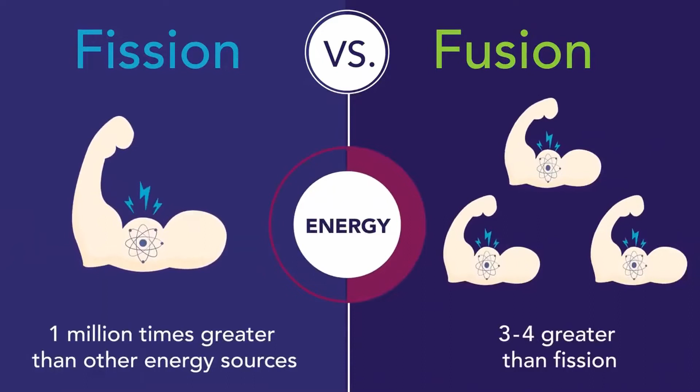Energy is key to our prosperity and well-being. But we need to reduce the use of fossil fuels because they produce greenhouse gases and contribute to climate change. A sustainable energy mix is the answer, and fusion can be a promising long-term option.

Fusion is the energy that powers the stars. Our sun is the source of life and light on Earth. It's also one of nature's biggest fusion devices. In its core, hydrogen atoms move at incredible speed. Due to the high pressure, they collide and fuse into a heavier atom, helium. The reaction releases lots of energy in the form of light and heat. This is what we call fusion.

Fusion can be a limitless source of energy. The fuel it requires is abundant, reducing the risk of any geopolitical tension. It does not emit any greenhouse gases. Fusion machines are inherently safe, pose no risk to nearby populations, and generate no long-lasting waste.

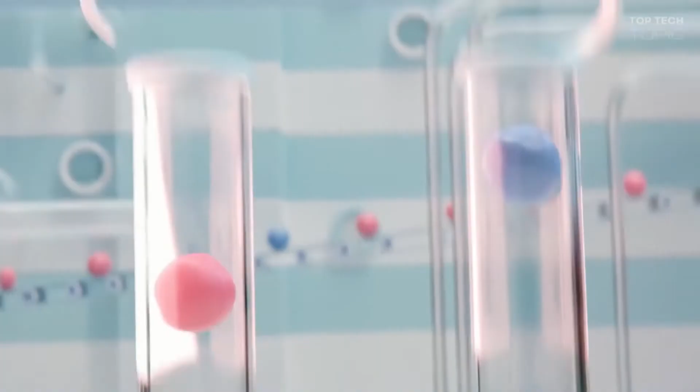To replicate the fusion reaction, we need to crush two types of hydrogen. Because they're both positively charged, they tend to repel one another. On the sun, due to the strong gravitational forces, hydrogen atoms fuse at 15 million degrees Celsius. On Earth, however, they would need to be heated to temperatures as high as 150 million degrees Celsius in order to collide and produce a hot gas called plasma.

For decades, scientists have been trying to produce fusion energy through various experiments. They came up with the idea of producing a super-hot plasma in a toroidal vessel, then capturing it with powerful magnets to keep it away from the walls. This is how the tokamak was born. Europe is working together with 6 countries to build ITER, the biggest fusion device, to help us get closer to this new energy.

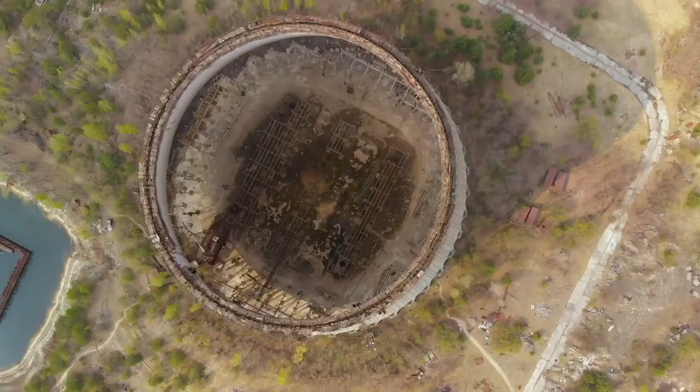Think of nuclear power, and many imagine the worst: atomic bombs, reactors melting down, radioactive wastes. There's no denying that the history of nuclear is fraught, and the dramatic and disturbing moments are hard to forget.

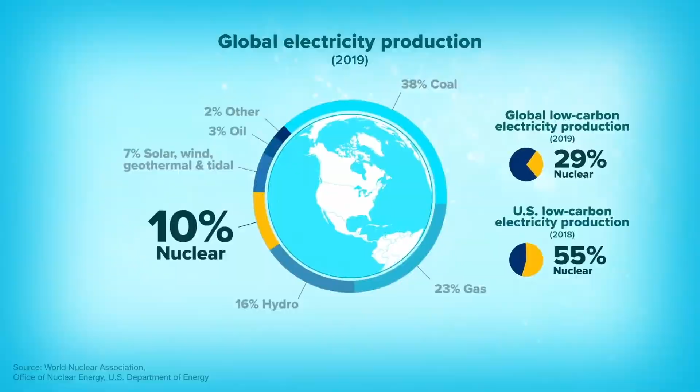But for the most part, nuclear energy operates out of sight and out of mind, generating about 10% of the world's total electricity. This represents 29% of all the world's low-carbon power, and 55% of the United States' low-carbon power. Nuclear reactors generate energy day and night and produce no greenhouse gases.

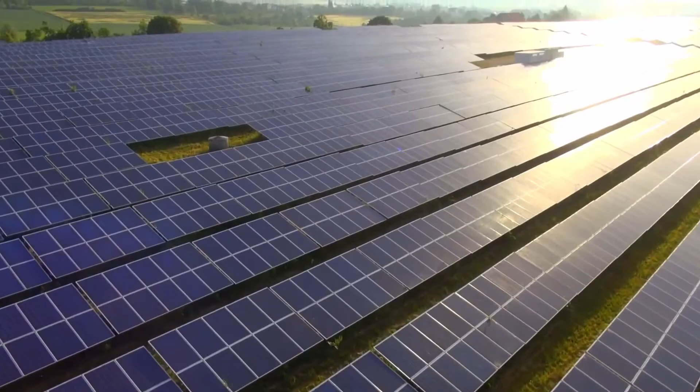But overall, the growth of nuclear is slowing in comparison to other low-carbon sources like wind and solar. Nuclear power plants are expensive to build, construction often takes longer than expected, and debates over how to handle radioactive wastes rage on. What's more, public opposition to nuclear power is strong, especially in the US.

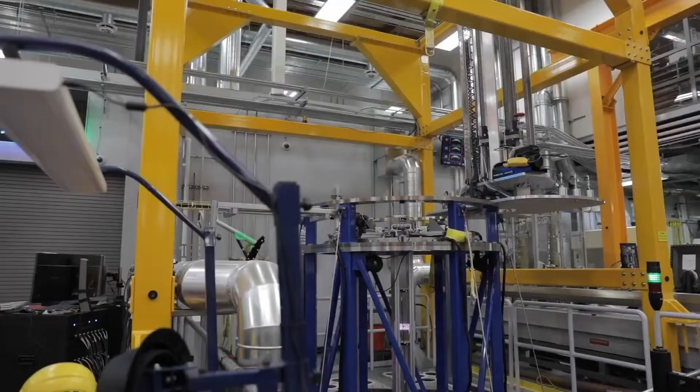But we're in the midst of a climate crisis, and many energy experts argue that despite a contentious history, nuclear has a key role to play in our energy future as a stable, always available source of power. Some experts are working to upgrade existing nuclear power technology, designing safer and more efficient fission reactors with the support of philanthropists like Bill Gates.

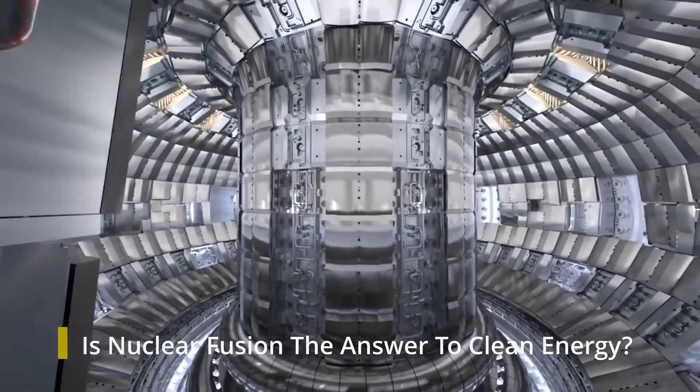But government labs, private investors, and intergovernmental organizations are also devoting vast resources to what many consider the holy grail of energy: nuclear fusion. Nuclear fusion is the same process that powers our sun and every other star in the universe. And if we can figure out how to harness that power here on Earth, it would be a huge game changer.

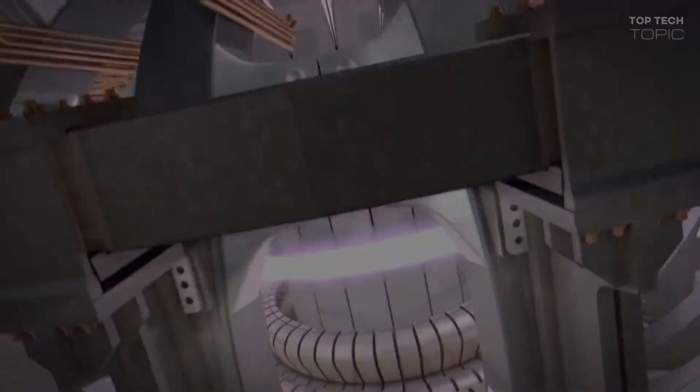Nuclear fission was discovered in late 1938 by a pair of German researchers. They found out that when you bombard uranium with neutrons, the nucleus splits, forming 2 lighter isotopes and releasing mass that gets converted into energy.

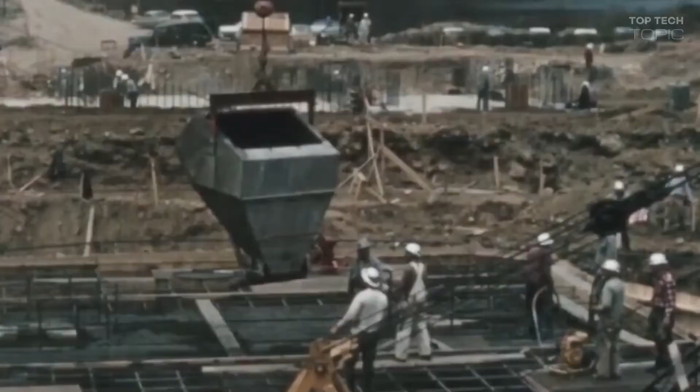The discovery paved the way for the development of the atomic bomb in the United States. And after the infamous bombings of Hiroshima and Nagasaki, concerns over nuclear proliferation spiraled as the global nuclear stockpile grew during the Cold War between the United States and the Soviet Union. But in 1953, President Eisenhower's Atoms for Peace program attempted to shift the focus of nuclear power toward peaceful energy generation, and much of the world started building nuclear power plants for civilian use.

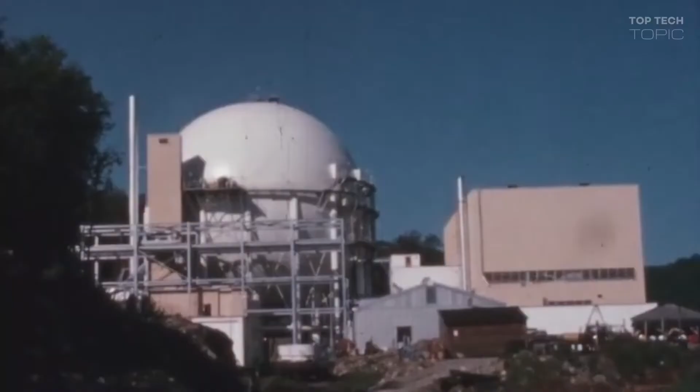Private industry quickly jumped on board, especially in the United States, and by 1991, the US had twice as many operating nuclear power plants as any other country. As of 2019, about 450 reactors worldwide operate in 31 countries. And some countries, such as France, Hungary, Slovakia, and Ukraine, get more than half of their power from nuclear energy.

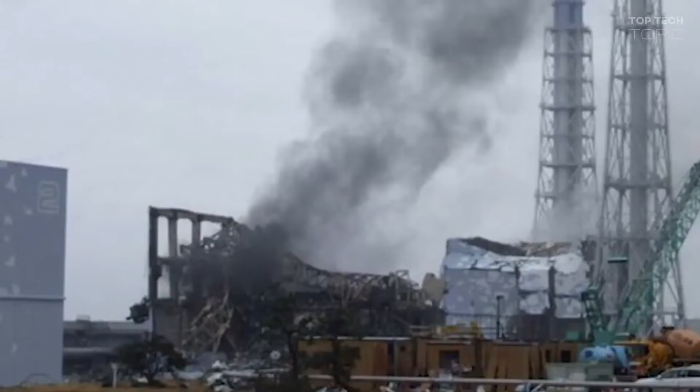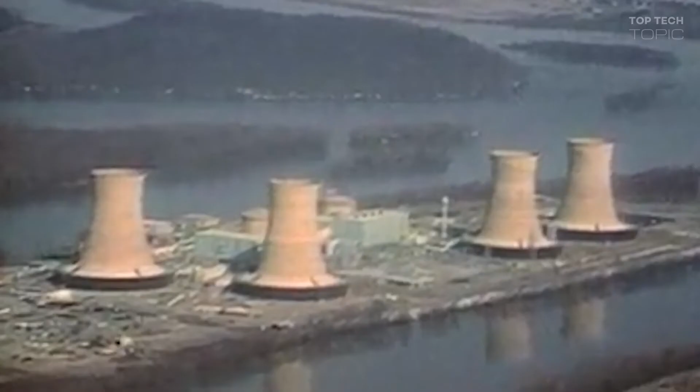But over the decades, a number of high-profile disasters have stalled the industry's momentum. In 1979, the partial meltdown and ensuing radiation leak at Three Mile Island in Pennsylvania cost about $1 billion to clean up. The disaster stoked public fears about nuclear power. Stricter safety standards were imposed, reactors became more expensive to build, and fewer were built.

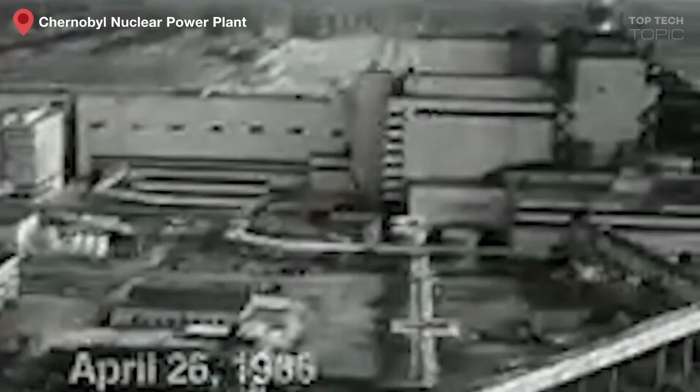The nuclear disasters at Chernobyl in 1986 and Fukushima Daiichi in 2011 led to further scrutiny of the industry, as concerns mounted over the long-term effects of radiation exposure.

And then there's the battle over where to store nuclear waste. One proposed site, Yucca Mountain in Nevada, has been hotly contested for over 30 years. Yucca Mountain is unfit as a repository site for nuclear waste because of the impact it would have on national transportation.

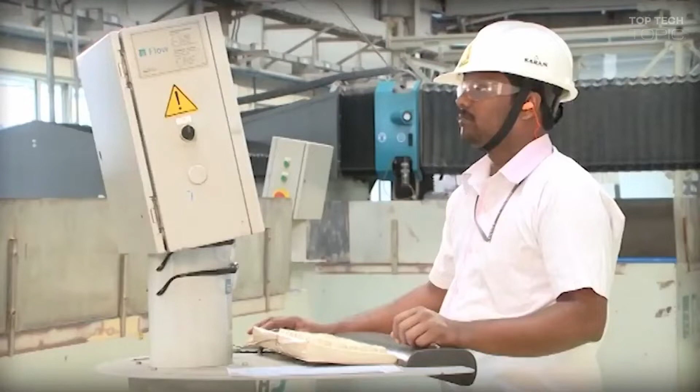The current state of the industry remains mixed. Countries such as China, India, and Russia are building new reactors at a fairly fast clip. But in the United States, more than one-third remain unprofitable or face closure.

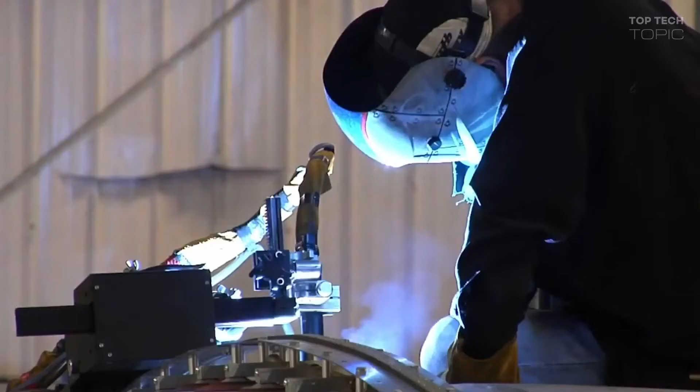Only one new nuclear reactor has come online in the U.S. since 1996, as costs and construction times in developed economies have spiraled. Next-generation fission technologies are much safer than reactors of the past, and some proponents claim they'll be cheaper too. The general public may still need convincing, but one idea has outlasted the controversy: the promise that someday nuclear fusion will provide a better alternative.

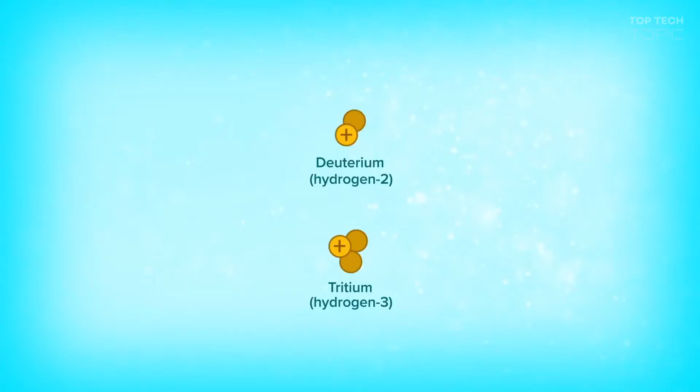Scientists have been researching nuclear fusion since the 1920s, ever since they learned it's what powers the sun. In a fusion reaction, extreme temperatures and intense pressure cause hydrogen atoms to fuse together, forming helium atoms. In the process, the atoms lose some mass, which is converted into vast amounts of energy.

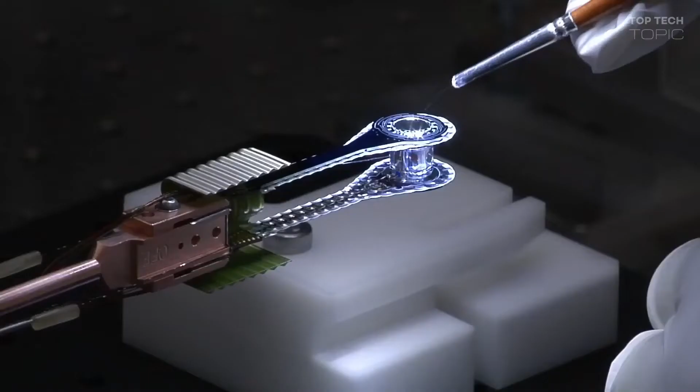The reaction could produce 4 times as much energy as nuclear fission, and nearly 4 million times more energy than burning coal or gas. But after decades of research and billions of dollars, scientists still have not found a way to create a sustained fusion reaction. That's created a not-so-inside joke among scientists, that fusion is the energy source of the future and always will be.

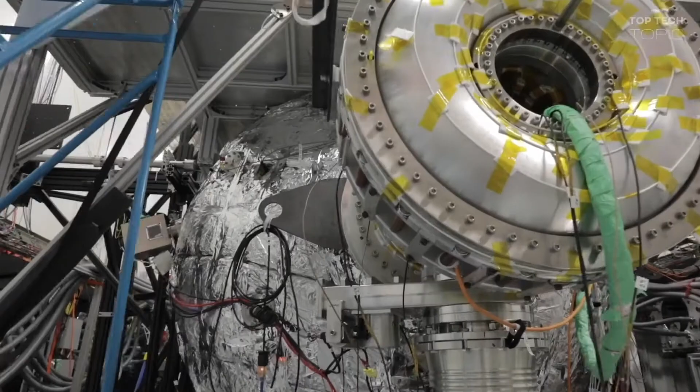But some think these questions and jokes overlook the real progress that's been made. Fusion has traditionally been the purview of government labs like Lawrence Livermore and Oak Ridge. But more recently, a number of private companies have thrown their hat in the ring. This includes General Fusion, which aims to bring a commercial reactor to market in the 2030s. Amazon CEO Jeff Bezos is among the company's investors.

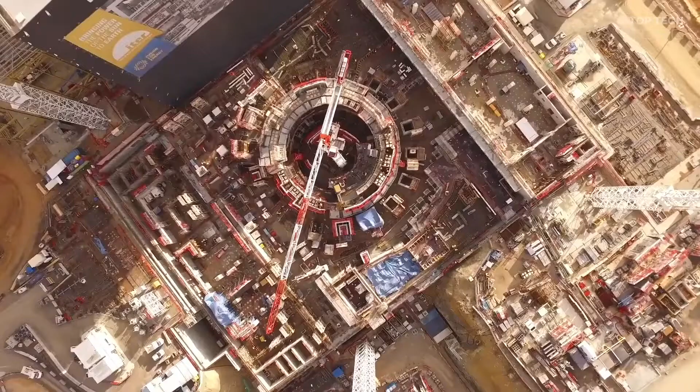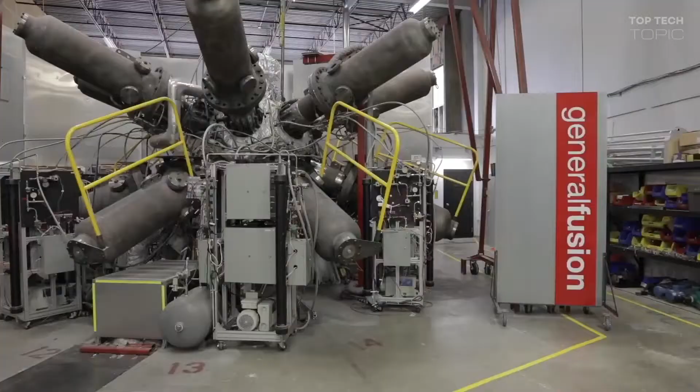And then there's the large multinational effort that's underway in the south of France. Called the International Thermonuclear Experimental Reactor, or ITER, the project aims to create the world's largest and most powerful fusion reactor. While all of these players are competing for resources and funding, that could actually be a good thing for the nuclear power industry overall.

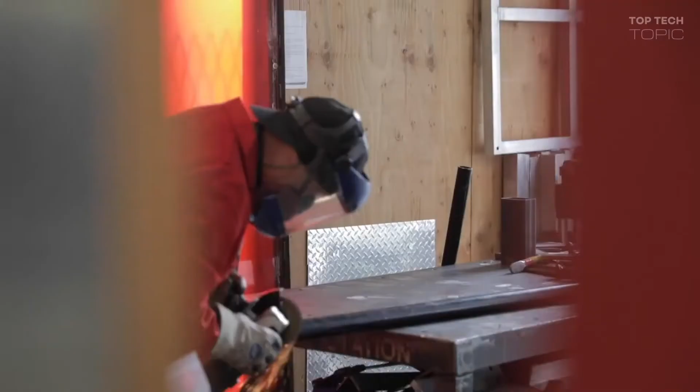General Fusion, founded in 2002, operates out of a nondescript office park about 20 minutes outside of Vancouver. Unlike most government labs or academic institutions, General Fusion is focused on implementation over research. The company's goal is to build an electricity-generating fusion reactor in the next decade or two.

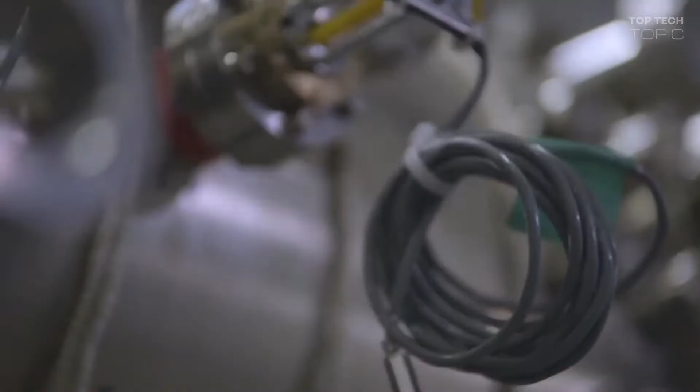Jeff Bezos was an early investor, and the company has now raised over $120 million, with about $90 million coming from private investment and $30 million from the Canadian government.

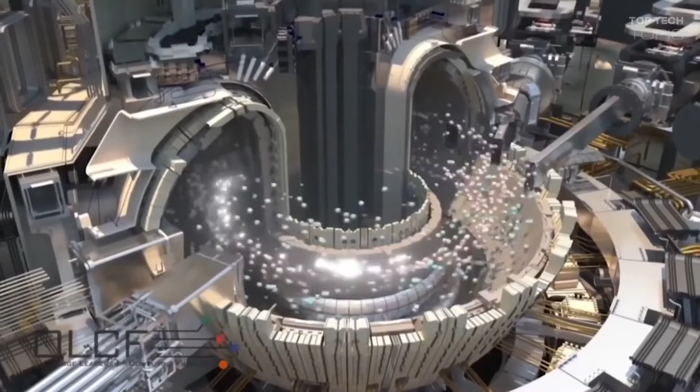General Fusion combines 2 common approaches in the industry: inertial confinement, which subjects the fusion fuel to extremely high pressure for a brief amount of time, and magnetic confinement, which uses modest pressure for a prolonged time. When heated to extreme temperatures, the fusion fuel becomes a plasma, a state of matter similar to gas, except that it contains charged particles that allow it to conduct electricity and respond to magnetic fields.

Our compressor is going to be a big sphere, about 4 meters across, 15 feet across on the inside. And into that big sphere, we are going to put liquid metal. And that liquid metal we're going to spin around in a circle so it opens a hole. And into that hole, we're going to put our fuel, which is hydrogen gas. It's preheated up to a few million degrees.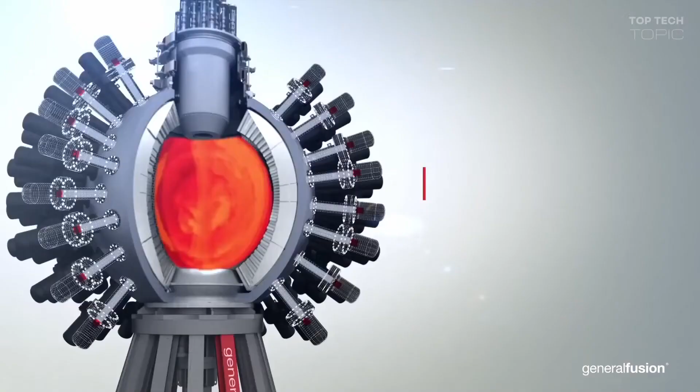And then all around the outside of this sphere is a big array of pistons driven by compressed gas. So they push on the liquid metal and they collapse the hole with this fuel trapped inside. And that collapse happens very quickly and compresses the fuel up to fusion conditions. At the peak of the compression, the fuel ignites and gives a fusion reaction.

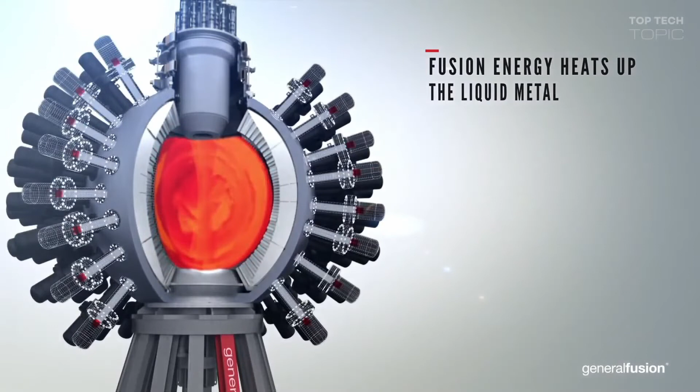That energy goes into this liquid metal, so the liquid metal heats up. You take this hot liquid metal out, you run it through a heat exchanger and you boil water and make steam. And the steam drives a turbine to make electricity and puts it out on the grid. And we just keep pulsing and do that over and over again.

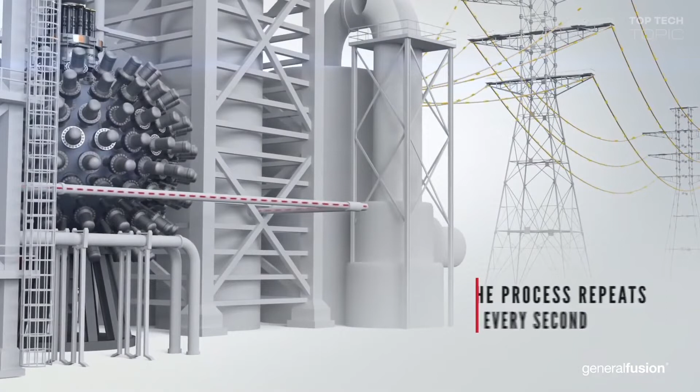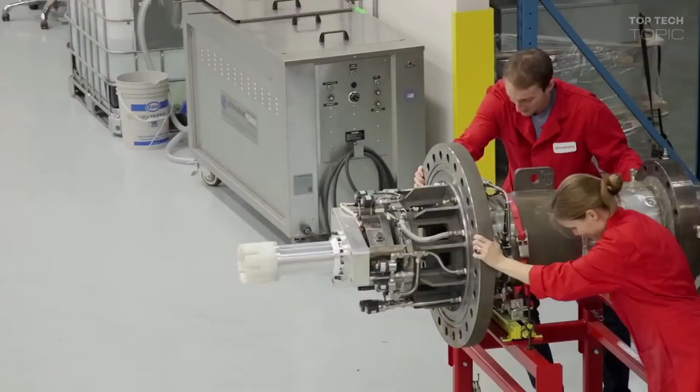Right now, General Fusion's main components, like its plasma injector, piston array, and fuel chamber, all exist separately. Laberge wants to integrate them into one large demonstration reactor, a process he estimates will take about 5 years.

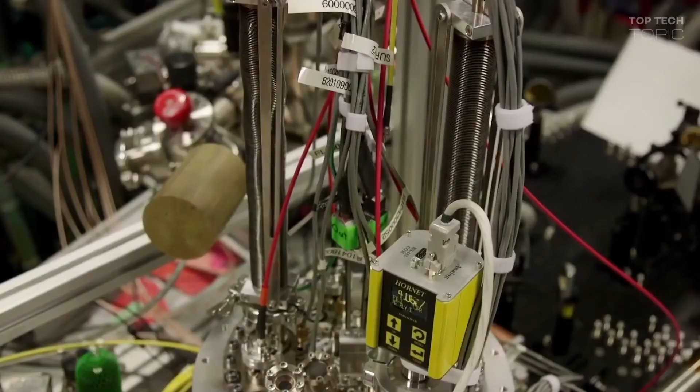A space roughly this size would fit a power plant that would be enough for 100,000 homes. And when the reactor goes online, LaBerge says it will bring General Fusion's cost of power into competition with coal and renewables like wind and solar.

LaBerge hopes it will eventually become cheaper, though, a likelihood if the U.S. decides to implement a carbon tax. But some industry experts believe that private companies like General Fusion are being overly optimistic with their timelines.

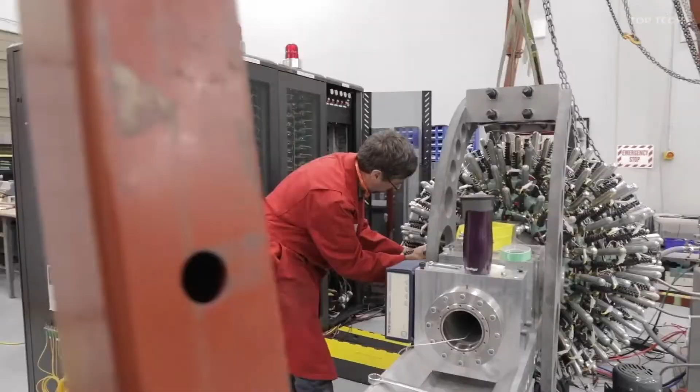Nuclear fusion is hard. No research group or company has ever been able to reach the so-called break-even point, at which the energy released from a fusion reaction is greater than the energy required to heat the plasma used in the reaction. But basic research is the bread and butter of Lawrence Livermore National Lab.

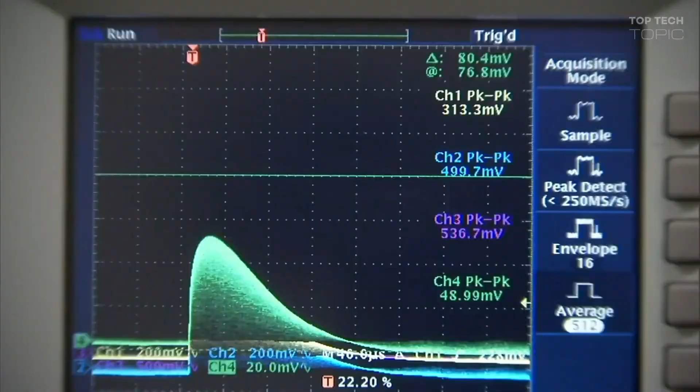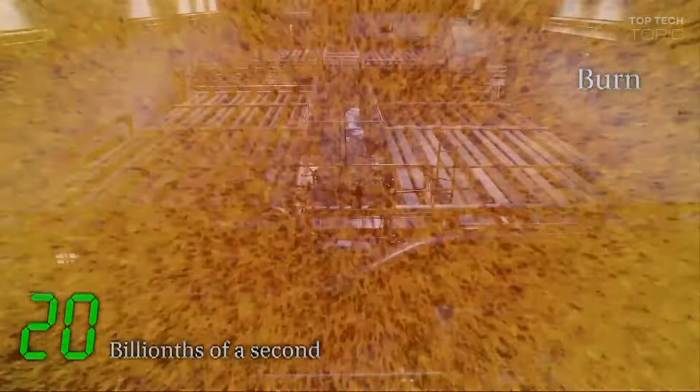It's been researching fusion since its establishment in the 1950s. In 2009, the lab opened the National Ignition Facility with the goal of achieving break-even and ultimately igniting a fusion reaction. Lawrence Livermore is pursuing inertial confinement fusion—that is, confining plasma at extremely high pressure for a very short amount of time, using high-energy lasers to do so.

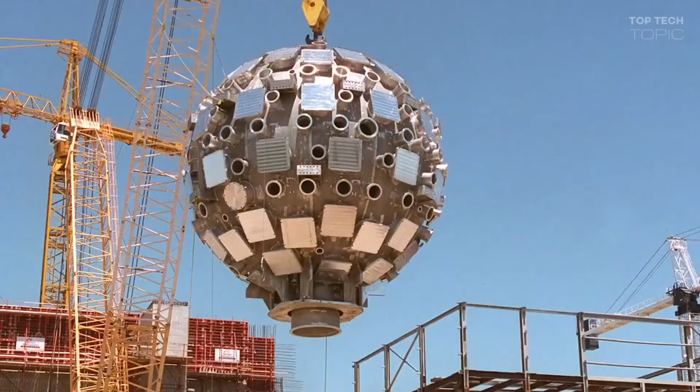We're standing in what we call our target bay, looking at our target chamber. The target chamber is a big ball about 30 feet across. And at the very center of that ball, we put a very tiny target about the size of the tip of my finger.

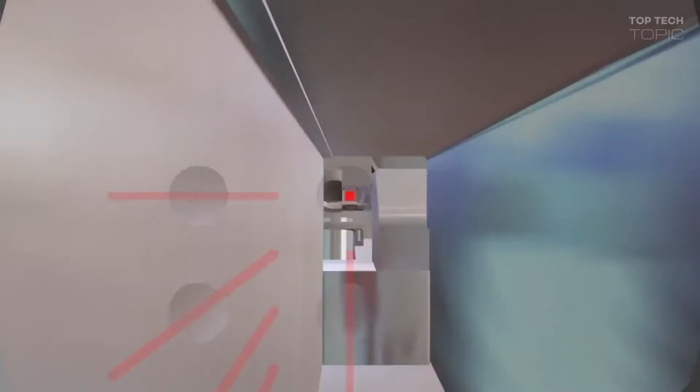Researchers at the National Ignition Facility and other national labs have access to enormous computing power, allowing them to run complex simulations that help them understand the exact conditions necessary to reach ignition. Based on our best simulations, they say that a facility of this scale is big enough to create this runaway reaction if everything works nearly ideally. But clearly, getting everything to work perfectly in the real world is much harder than it looks on a screen.

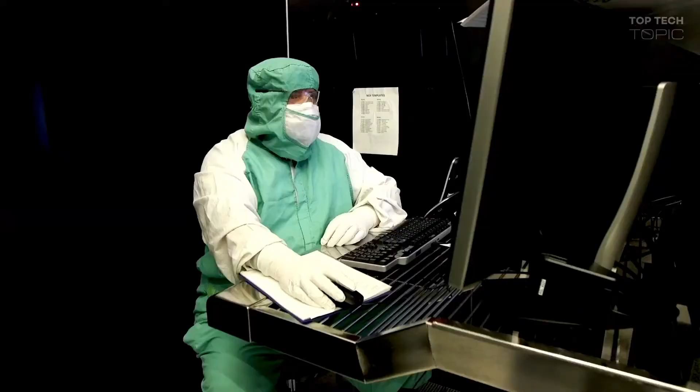So it could very well be that neither the well-funded, research-oriented national labs nor the scrappy, goal-oriented startups are going to solve the fusion puzzle. It might just take an international effort.

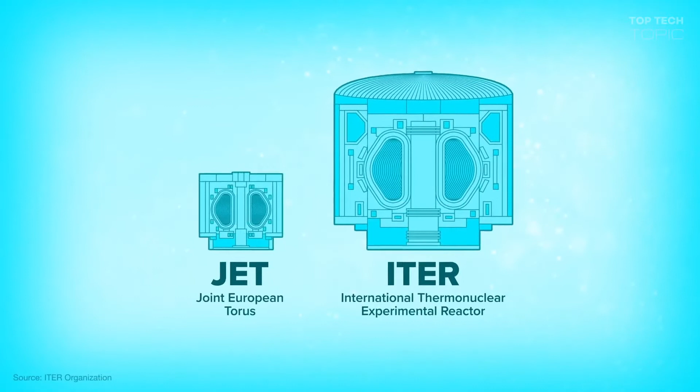The ITER project, originally known as the International Thermonuclear Experimental Reactor, originated nearly 35 years ago at the Geneva Superpower Summit. Now, China, the European Union, India, Japan, Korea, Russia, and the United States are all working together to build what would be the world's largest tokamak reactor, the donut-shaped device used for magnetic confinement fusion. Currently under construction, ITER's tokamak reactor will be twice the size of the current largest machine, and aims to produce 500 megawatts of fusion power from 50 megawatts of heating power.

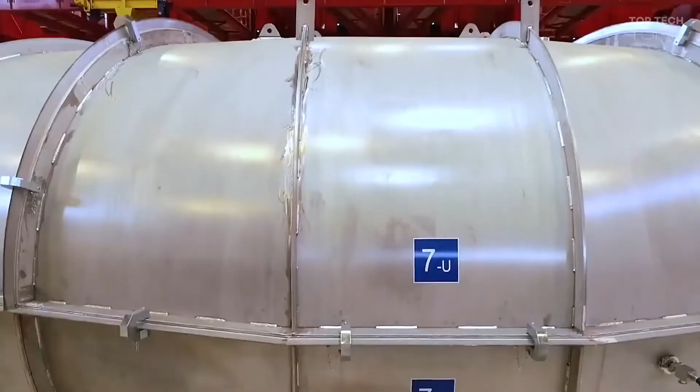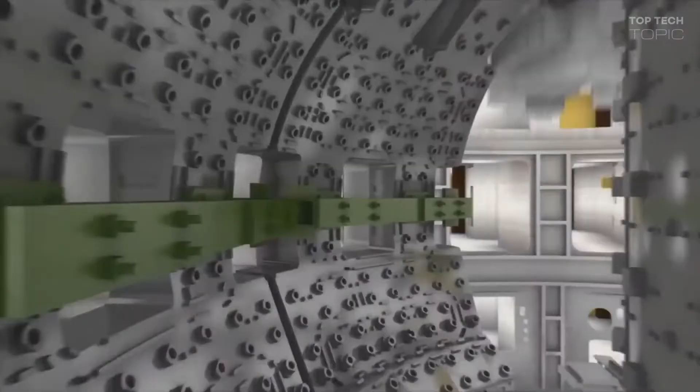But Henderson says ITER is poised to surpass previous efforts simply due to the sheer scale of the proposed machine, which builds upon already established technologies. Unlike General Fusion's ambitions, the immediate goal of ITER is not energy production, though the project does have an eye towards eventual commercialization. We'll start building the actual tokamak itself, which is about 30 meters in diameter and about 30 meters in height.

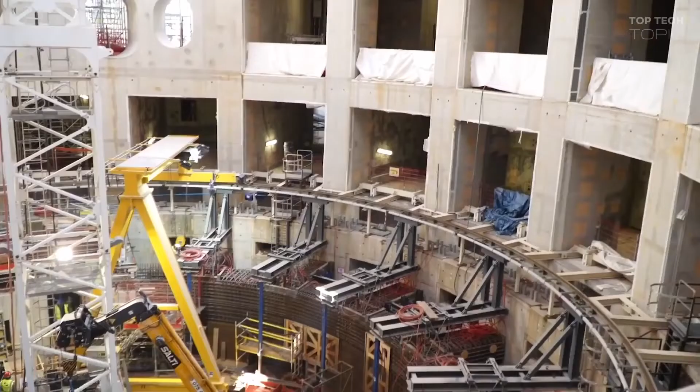And that device should be completed around the 2024 period, and then we're targeting to go nuclear in the 2035 period. So by 2040, which seems a long way off, we will have gained all the information that allows the next generations to build demos. Henderson hopes that these demos will achieve ignition, opening the door for industrial-scale reactors that generate electricity for the grid.

It's a grand vision, but even if ITER hits all its targets, how to translate that into a commercially viable reactor remains somewhat unclear. Henderson says it's impossible to say right now what a fusion reactor would cost or if the price point would be competitive.

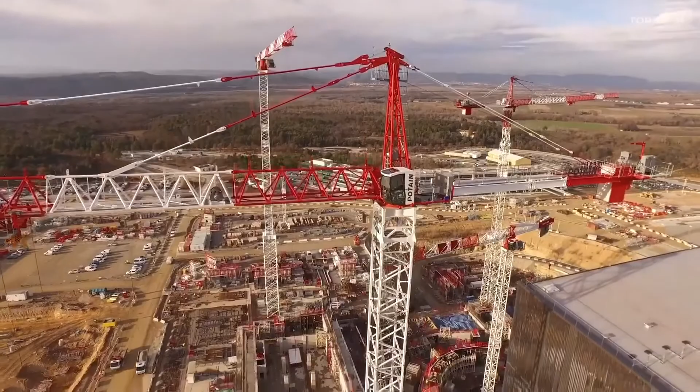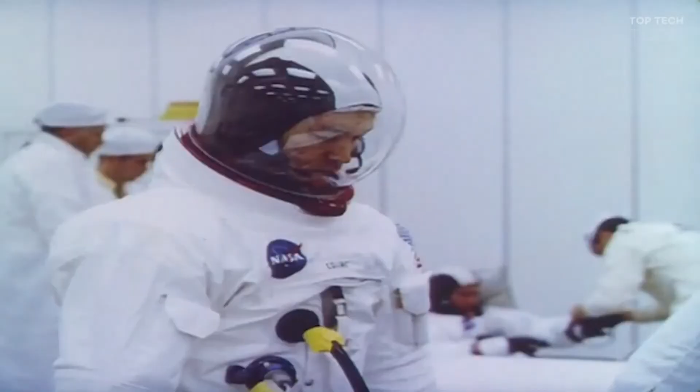There is, however, a price tag on ITER itself, and while it's not cheap, it's not necessarily exorbitant for an undertaking of this magnitude. ITER is going to cost roughly about $20 billion. It cost roughly about $120 billion in today's money to put Neil Armstrong on the moon. So we're a fraction of that cost, and yet what we're offering is countless generations a clean, basically limitless energy source. It's stupid we don't do this.

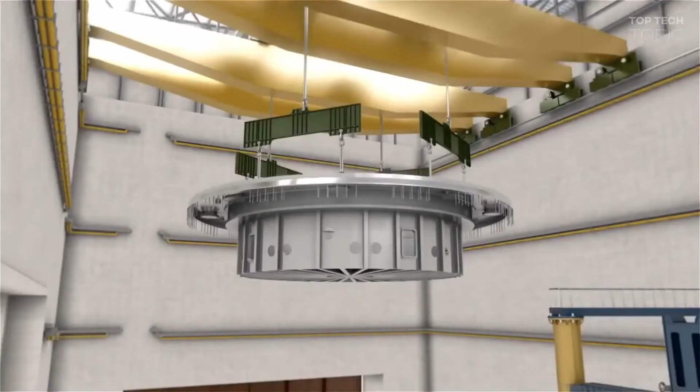Despite the project's obvious potential, funding for ITER can be intermittent and unreliable, as countries like the United States frequently change their contribution levels in tandem with their election cycles and energy budgets.

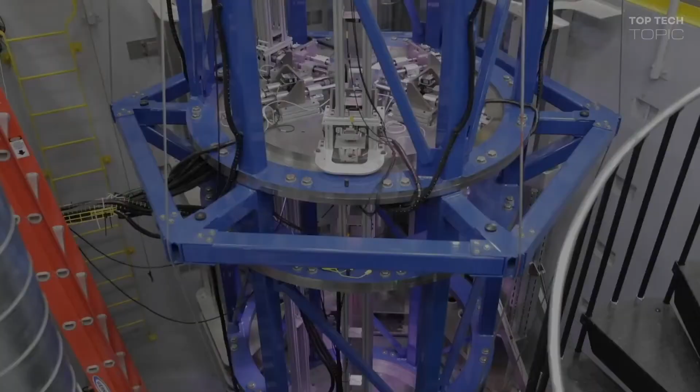Not everyone thinks fusion is so integral to our survival. Public opinion on nuclear fission remains split, but many within the industry say the controversy is undeserved.

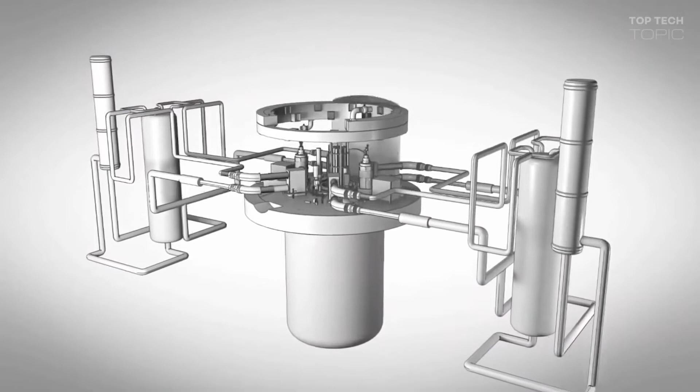Microsoft's Bill Gates is one of these proponents. He's intent on building safer and more efficient fission reactors to reinvigorate the industry. In 2006, he founded TerraPower, a nuclear reactor design company that's working on building new Generation 4 reactors.

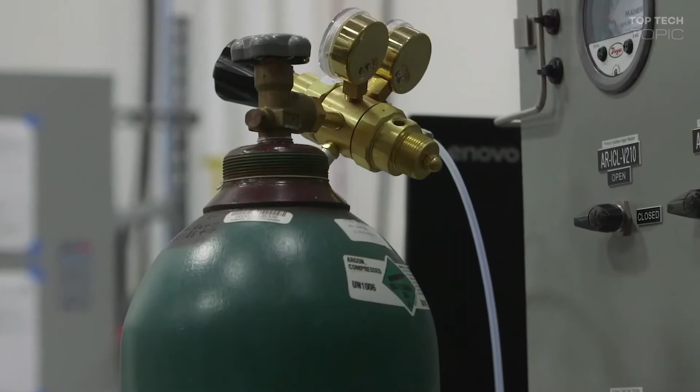Levesque also says TerraPower's reactors are walk-away safe. That means that during emergencies, the plant will cool and stabilize itself without an operator present. Furthermore, Levesque says the plant produces 80% less waste and requires less uranium enrichment, allaying proliferation concerns.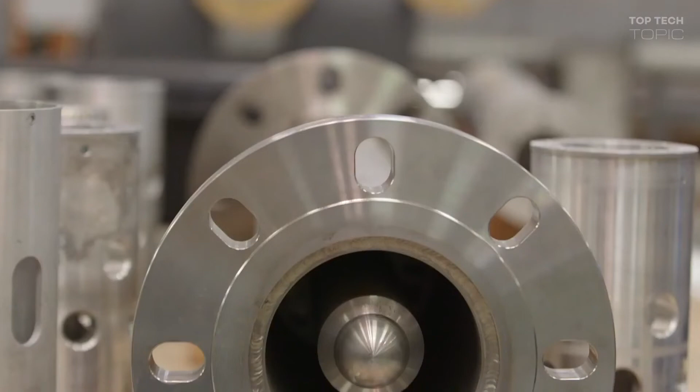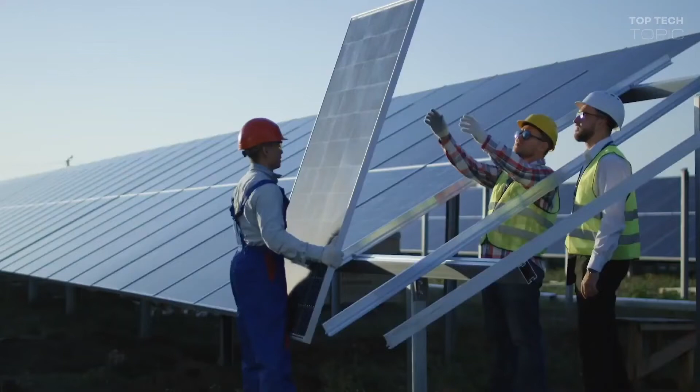But getting new fission technologies off the ground is an expensive endeavor, so companies like TerraPower want government support, both to build out their tech and to help them compete with cheaper power sources, such as natural gas. The U.S. government does this all the time. They did it in the case of hydraulic fracturing, they did it in the case of wind and solar, and now it's time for the U.S. government to help demonstrate the next phase of nuclear technology as well.

Levesque estimates that building TerraPower's first demonstration reactor will cost more than $1 billion, ideally funded through a public-private partnership.

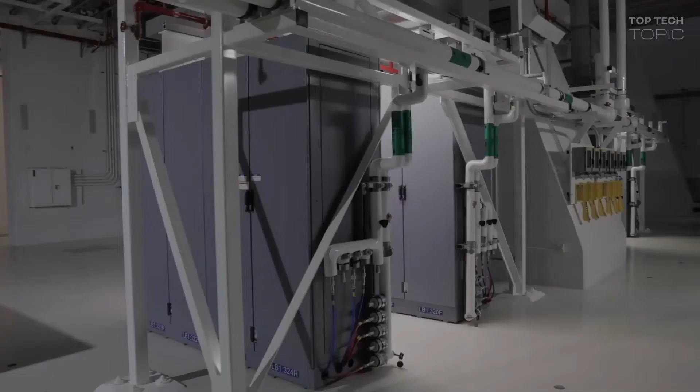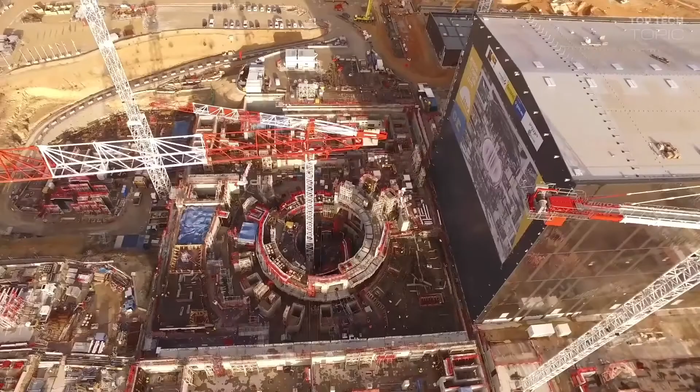So here's where we stand. Fission proponents want to upgrade existing nuclear power plants and technologies. Fusion researchers say projects like General Fusion and ITER need more investment from both public and private sources in order to turn nuclear fusion into a reality.

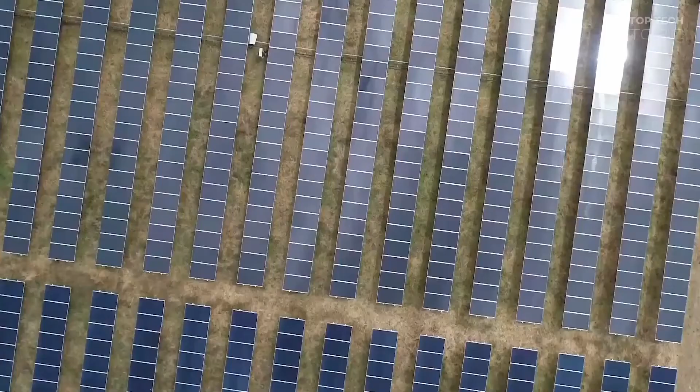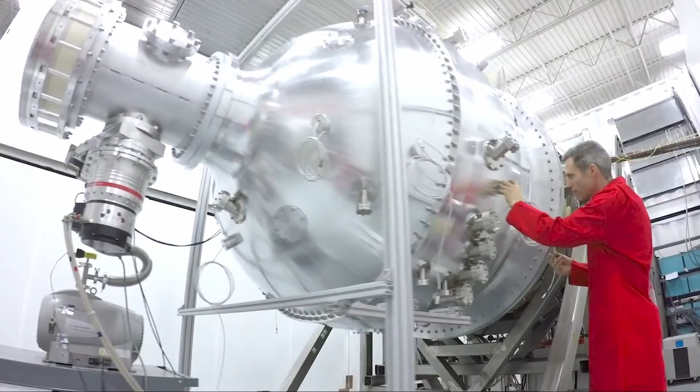And climate change activists say the world needs to decarbonize using the resources we have now, before it's too late. We need to turn to fission, turn to solar, turn to wind, turn to geothermal, turn to hydroelectric, do whatever we can to get off of the carbon addiction. Then, if the research and investment comes to bear, we can turn to fusion to support our rapidly growing population.

How soon we'll reach this fusion-powered future remains up for debate. However, these estimated timeframes may rely heavily on how much government decides to invest in fusion power.